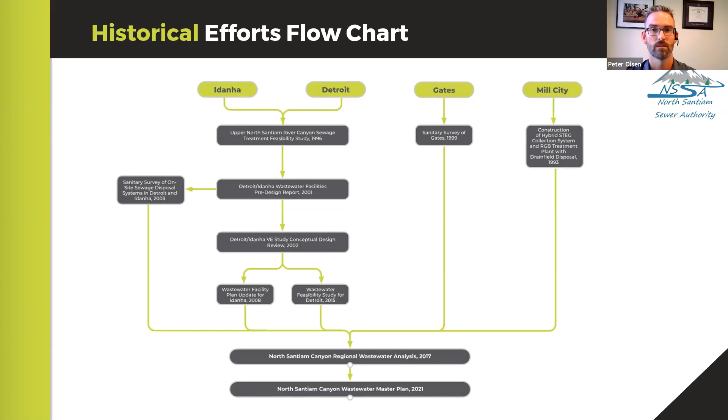Now we come to the master plan. We've come to a point where we have draft reports ready and have gone through the process of reviewing with the TRC and with the board, and we're here for this presentation tonight. The next 4 slides cover much of the information that was in the previous town hall. We have population for the planning criteria.

We looked at collecting a lot of data, working with the published data, the Portland State University populations. We looked at Sisters as a case study for what it would look like when these communities do get a community wastewater system, and what effect that might have on the population projections. We looked at environmental resources for the canyon communities. We looked at establishing the flows. We looked at Mill City since they're the community of the 4 that has an existing system.

Looked at the historic flows and projected those out. And then we looked at the winter water usage for Idanha, Detroit, and Gates to give us an idea of what the average dry weather flows would be for the new wastewater systems. And then used the peaking factors that were developed in the process and projected those flows out to know what to plan for. And then we provided additional capacity as well for future industrial commercial users that may connect to the systems.

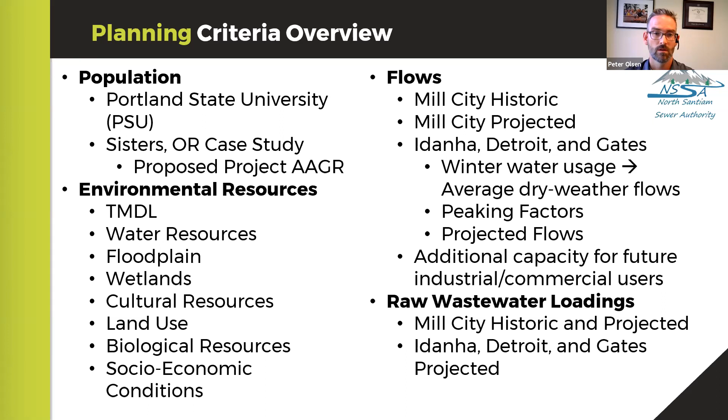We did a similar analysis with the raw wastewater loadings, looking at Mill City's historic and projected those, as well as recognizing that they are an effluent system only, and so the loading would be different than if it ended up being a gravity system. Our data collection process was pretty lengthy, collected a lot of data from each city. This is just representative of some of the cities and Mill City specifically with their existing system.

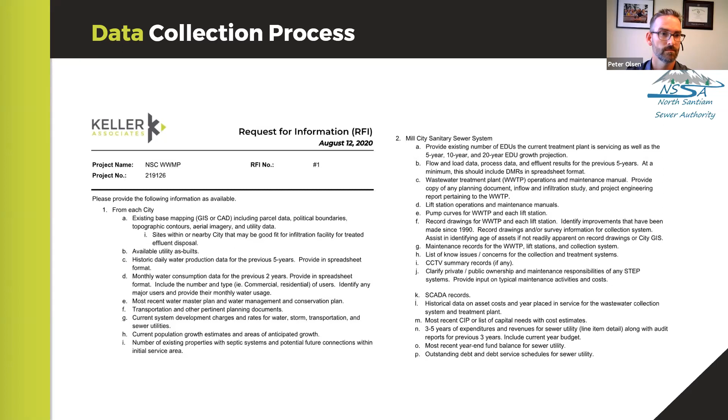As I mentioned, we looked at the population and Sisters, and then we used that to help inform the projections that we discussed with the TRC and the board and agreed upon what those projected numbers would look like. So on this one, Peter, if I could stop for a second, it has Gates, Mill City, Lyons, and Mehama on our original look that we did in 2017. After we were in the planning stages, Lyons actually did not want to move forward. And so while they're in the initial planning stage for the feasibility study, they were not included in the more final information. Thanks, Danielle.

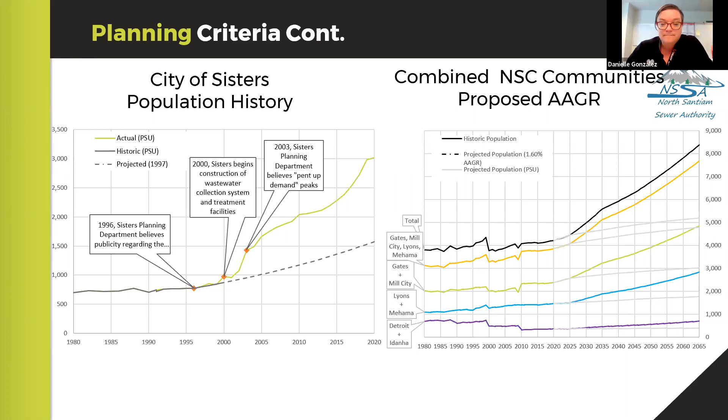This is just a representation of the amount of data that was collected, processed, evaluated, and looked at for Mill City as the existing system, but also the new systems for Gates, Detroit, and Idanha. What we're looking at is what I explained already with the flows, looking at the existing flows or demands for the water system and using those to help inform what the wastewater flows would be.

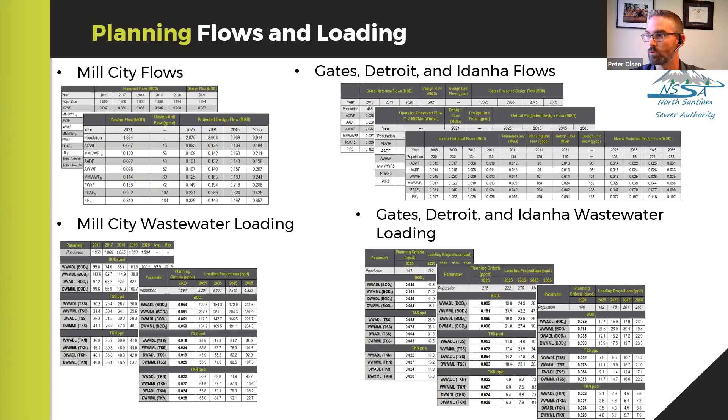Looking for questions as far as missed items there, anything that was missed from that planning criteria. And as I mentioned, this is a bit of a review from the previous town hall. And I'm looking to Danielle for those questions. Yeah, I'm not seeing anything in particular. We have one question that we'll hold off on just a little bit more until you get to the life cycle information, and I'm not seeing anything else in the chat right now. The only thing is about the city of Lyons, and so I'm going to answer that one in the response. Okay, thank you.

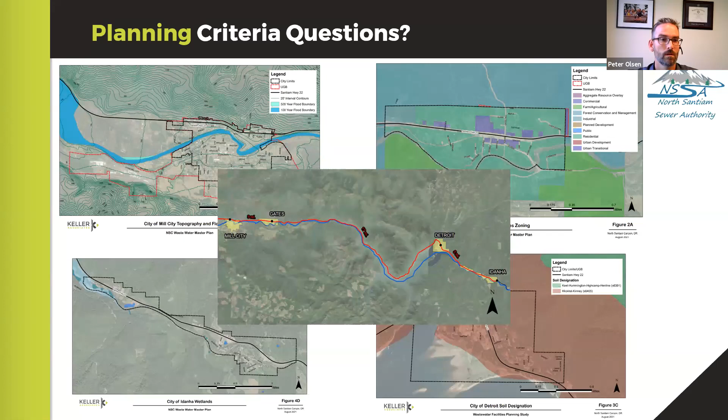And the treatment, it is a remote treatment, so it holds back the solids in the septic tanks. Some minor amounts that are in the effluent get through, but that treatment happens in the remote treatment with a recirculating sand filter. And then for disposal, it's disposed to a large drain field that is adjacent to the water pollution control facility.

Its performance that we reviewed and summarized was that it's observed that the historic flows have exceeded the rated capacity. When we started, it had come close. And then by the time we had finished and added additional data to supplement that, it showed that it had exceeded the rated capacity for the peak day flows.

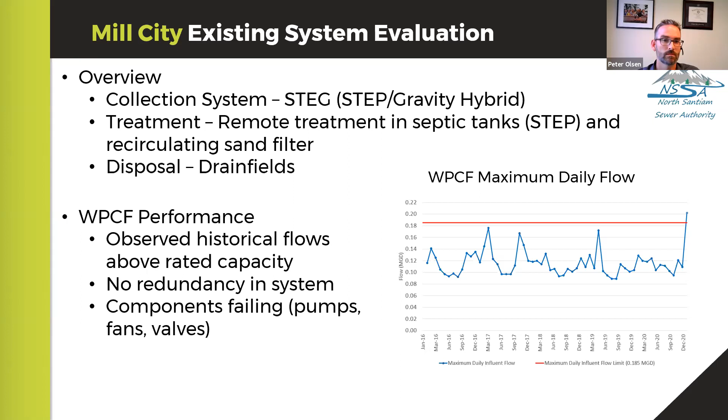Now we get into the collection system overview. We considered different alternatives, looking at the treatment and disposal basins with the 4 different communities, where they're located, adjacent, how far they're separated, and so on. Looked at transfer pump stations and force mains, and looked at potentially an overhaul of Mill City's existing collection system, the STEG, and then looked at STEP versus gravity in Gates, Detroit, and Idanha.

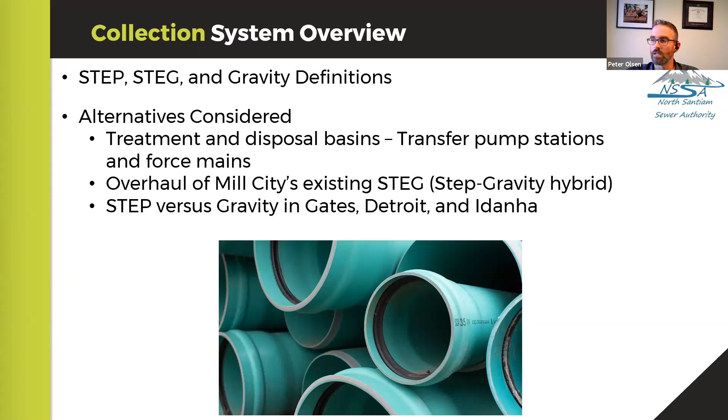A little review of what STEP and STEG and gravity is. The STEP is septic tank effluent pumping. The STEG, as I mentioned, is the septic tank effluent gravity. The difference being the STEP has a pump inside that pumps it uphill and into a pressurized system. And the STEG comes out of the septic tank and is gravity fed out of the tank into the collection system.

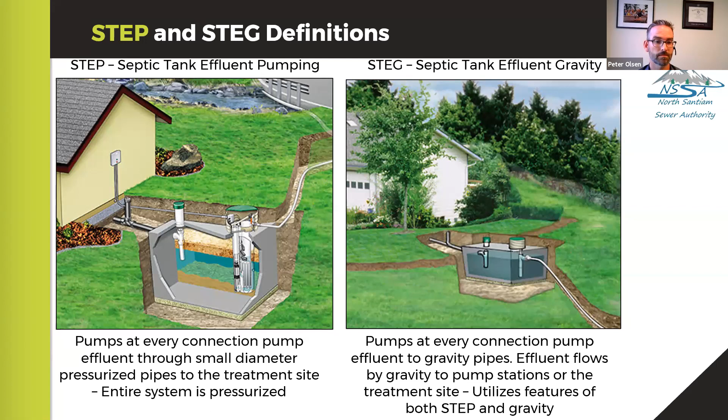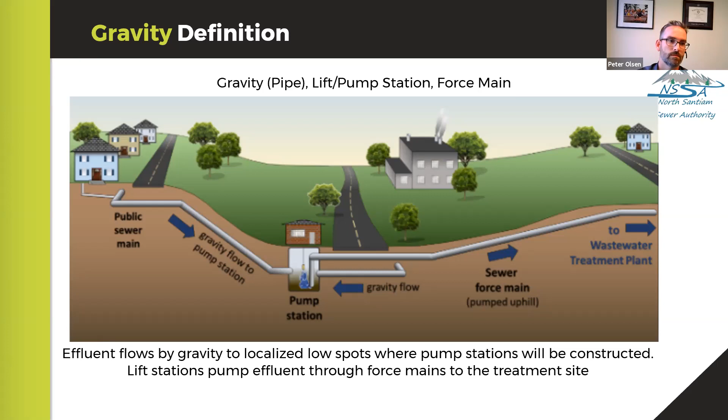As far as the basin recommendations, being Mill City and Gates and their proximity, and Detroit and Idanha and their proximity, the recommendation there is not to have pipelines between Detroit and Gates for a number of different reasons, the length being the major reason. So we're recommending Detroit and Idanha be combined as one sewer basin, and Mill City and Gates be combined as a sewer basin, and that has implications for the collection system as well as the treatment system and disposal as well.

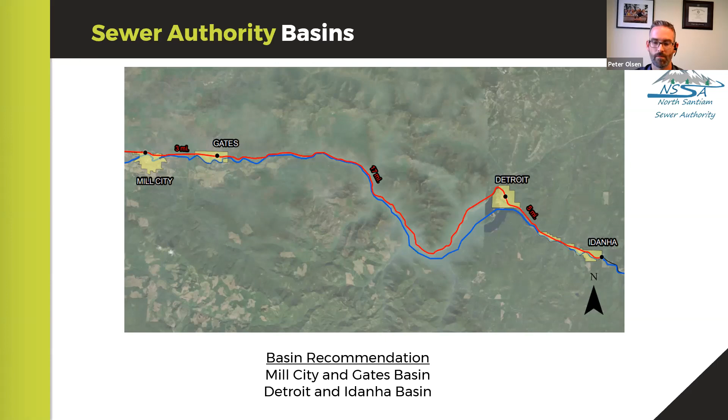For the regional pump stations, as I mentioned, and we'll have some more graphics to show this in better detail, they're looking at transferring the wastewater from Gates to Mill City to the water pollution control facility site, and then transferring the treated effluent from the Mill City water pollution control facility to the selected disposal site. And then for Detroit and Idanha, it's transferring the wastewater from Detroit to Idanha to a water pollution control facility site, and then transferring that treated effluent from Idanha to the disposal site.

And Idanha's collection system would be feeding to the same place that Detroit would be pumping to, and likewise Mill City would retain the same collection system, where it transfers all the wastewater to the water pollution control facility in Mill City.

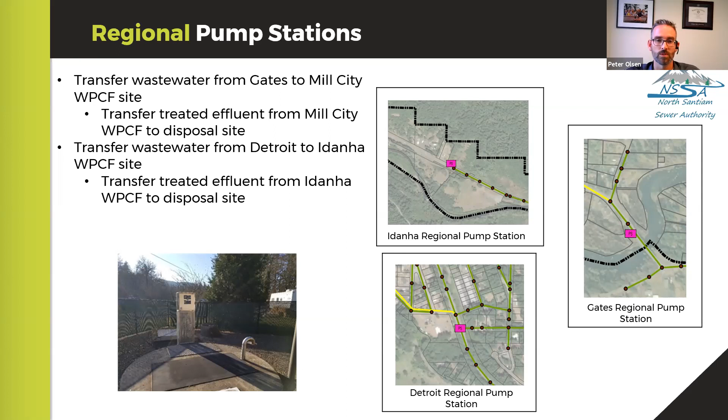For the collection system recommendations, we looked at evaluation criteria. We broke it out into 5 different criteria. We have the capital cost with the fixed initial expenses. We have the annual operations and maintenance, which is the annual expenses incurred by operating, maintaining, and servicing the system. The system reliability, which is the expected or potential downtimes of the system. And ease of operation, so it's the effort required by the system operator to ensure the system continues to operate. And then expandability, the 5th one, is the flexibility of the system to accommodate expansion.

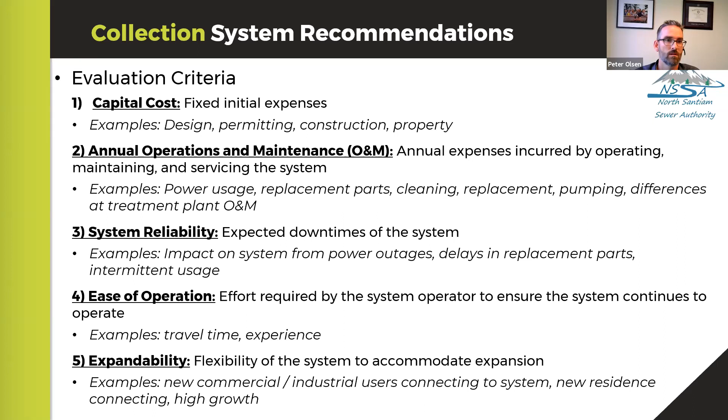Those 5 criteria you can see on the left side of the table here. We, in discussions with the board, put together weighting criteria that sum up to 1, and then looked at the 3 different options: all communities on a STEP system; option 2 with Mill City on the similar STEG system and the others on gravity, so that would be Gates, Detroit, and Idanha on a gravity collection system; and then option 3, Mill City and Gates on the STEP system, and Detroit and Idanha on a gravity collection system.

We assigned the scoring for the different evaluation criteria, which resulted in the scores here at the bottom, indicating option 2, with Mill City on the STEP, and the other 3 on a gravity collection system. And I'll throw that out there. There was a very long discussion on this particular piece about the weighting criteria and what was important in those communities. And there are a couple of questions in the Q&A section from John McCormick, and we'll get to those.

Peter, in your presentation, you've got the financial pieces broken out. Is that right?

The financial pieces of what these look like? Yes, I believe so, later. So okay, we'll make sure we get to those, John. I see your questions in there. One of the questions, of course, is the capital cost in one of the systems. Peter, if you could go back one.

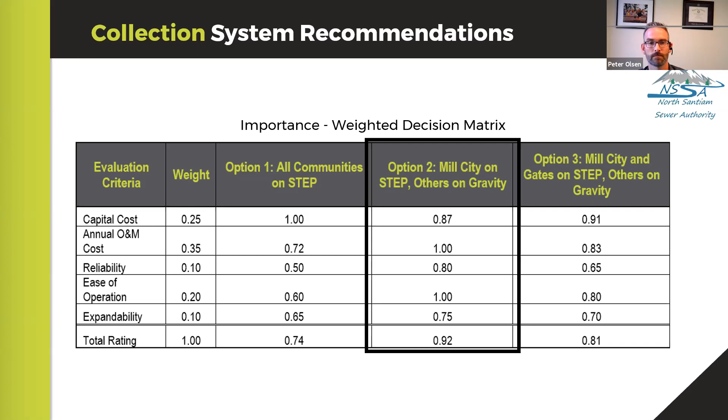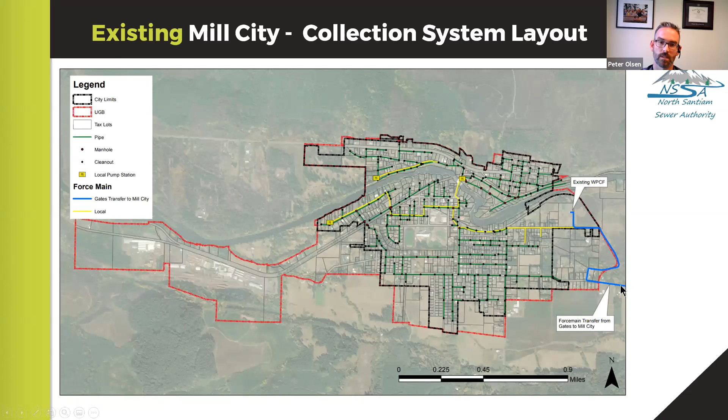This is the graphic representations of the collection system. So the existing Mill City collection system, this just shows what is already existing there, but adds the force main transfer from Gates to Mill City. We have Gates with the 3 lift stations and the regional lift station indicated, the 3 lift stations here in yellow, and the regional lift station located here with the force main transfer to Mill City.

The green lines are the gravity collection lines, and the yellow lines are the force mains from the pump stations to where they were anticipating they would discharge to the collection system or the regional lift station. And this would actually answer one of the questions that someone had posted via email a month or so ago.

This area on the Linn County side, on the other side of the river, is covered because it's within the city limits. So anything within the city limits in either Marion County or Linn County would be in this particular plan. And then there was a question about the force main going over the bridge over the Santiam River. And Peter's kind of assured me that is a common occurrence. You have to take some additional precautions and get approval through DEQ to do that.

But that is, yes, a possibility, and these locations, if you could use your cursor, Peter, on the Linn County side right over here would also be involved. Yep. Thank you. Yep.

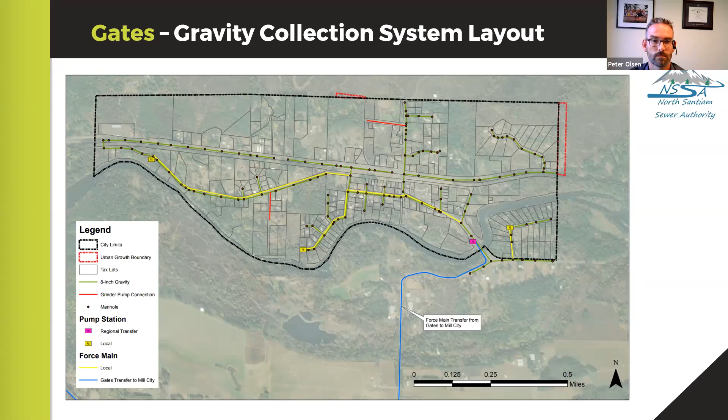This shows the potential path of the force main going from the regional pump station to Mill City. This yellow line is a potential path that we put cost estimates to as far as a potential disposal site. That site within Mill City has not been selected. That will be part of subsequent phases of the project.

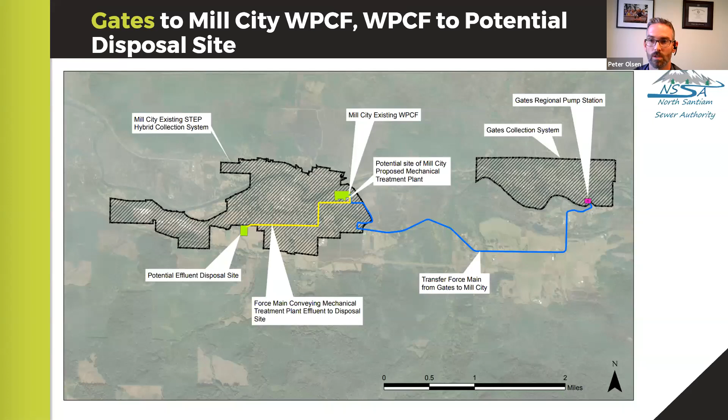But after a lot of review, and Peter, tell the truth on this one if there's anything I'm saying wrong, we weren't able to locate a suitable location in the Detroit area that was flat enough or had enough space, or doesn't impede on the 3 basin rule for us to actually do any discharge there.

Yeah, the disposal is the major challenge of this project. And there's even more criteria than that, and just lots of discussions with the regulatory agencies and everyone else in the technical review committee. Yes.

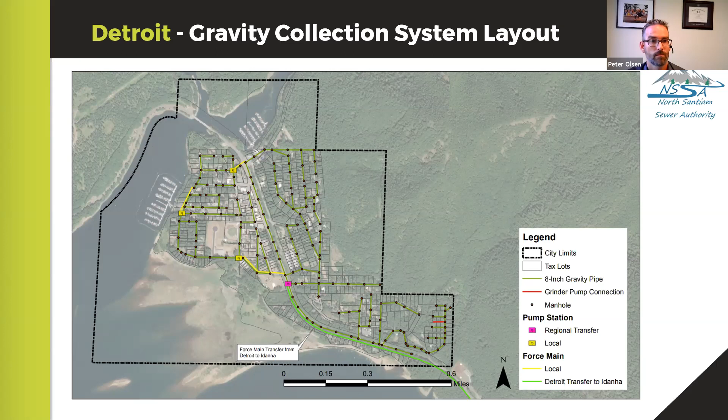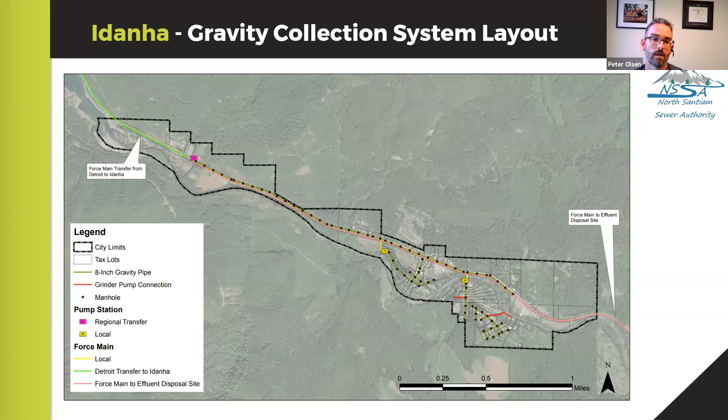And this is, as Danielle mentioned, a major hurdle and challenge for the wastewater in this area: disposal, and how to do it appropriately, how to be consistent or compatible with the 3 basin rule. Yeah, disposal of treated effluent. Yes. At a higher level of treatment than would typically otherwise be required.

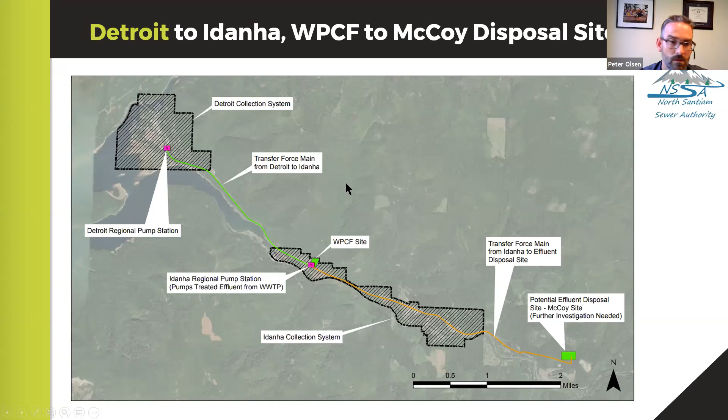Danielle, any specific questions on the layouts of the collection systems? So I'm gonna do my best. Let's see, John's got quite a few here. Hold on. Let me quickly.

The collection system of a STEP system versus a STEG system versus a gravity is approximately, according to John, an $8 million difference than the gravity system, and STEP is cheaper than gravity. And so I think I'm going to try to answer this one as best I can. Part of the reason the Sewer Authority has given Keller Associates the guidance on the upfront capital cost is it's more likely to be covered than the O&M costs in the future. And so they've made some policy decision on that. Of course, all of those things are being reviewed all the time because those policy pieces are going to change. Let's see, that one's a different one.

Okay, it says in the last sewer meeting, Peter from Keller suggested that there were many issues with the STEP systems, offering examples, saying it was a long list. On the collection side, out of the 4 that John McCormick has reviewed, he says that he finds the arguments to be weak or incorrect. The O&M cost for the STEP systems, I think you're talking about a specific product that's cheaper, not necessarily STEP systems in general. It looks like Peter considered the O&M cost for the STEP system pump replacements twice per decade for a 10-year cost of $1 million over time.

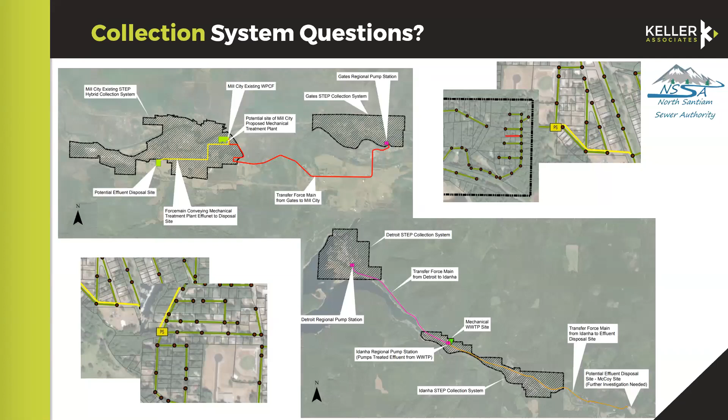Both the labor needed by the operator to service those pumps, as well as any replacement of bearings, seals, or any other components of the pump that can be replaced without replacing the entire pump. Okay. Thank you. That helps. Okay. I think we got that one.

And so another question about the state park and ranger station. This is in the collection system. So let's talk about that real quick.

So the state, there you're talking about adding the state park? Yeah, so we didn't include the state park or the ranger station in this initially. This is me just kind of talking through it. When you go through federal funding, it is forbidden to use federal funding to enhance other federal property. So the state park and the ranger station are technically outside of the city limits. And so we can get the lines as close as we can and stay within city limits, and then the state park or the ranger station can connect the rest of the way.

And that actually has been under discussion. And Peter, we put some flexibility on the expandability. Am I correct in that scenario? Yes, the anticipated flows and loading, yes. Okay. Yep. And I hope that answers that question. Okay. Okay, let's see.

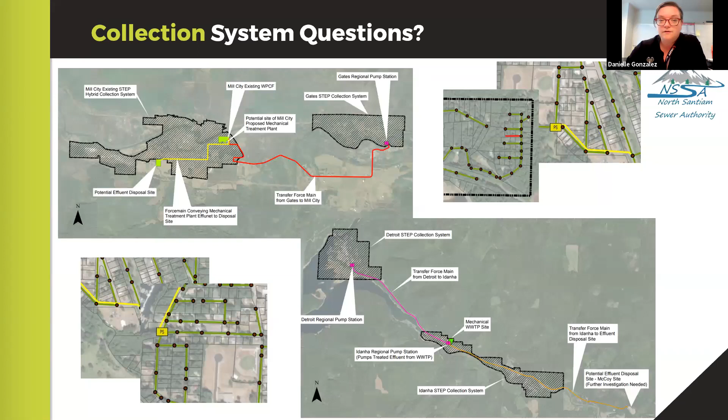And some of these other ones are very specific on costs, so we'll have to keep moving forward. Okay, go ahead, Peter. Right. Any other questions that anybody has? I'm not seeing anything else in the chat. So please feel free. All right. And then we'll try to keep answering questions along the way.

All right, as far as the treatment system overview, and Dallin, step in anytime you feel appropriate. As far as the treatment plant considerations, they're driven by the regulations, those permitting requirements, and the site suitability. This is a challenge in the Canyon communities, not necessarily because of the 3 basin rule, but because of the high groundwater quality requirements to discharge to groundwater. It requires a higher level of treatment. We'll talk about what that mechanical treatment plant overview looks like.

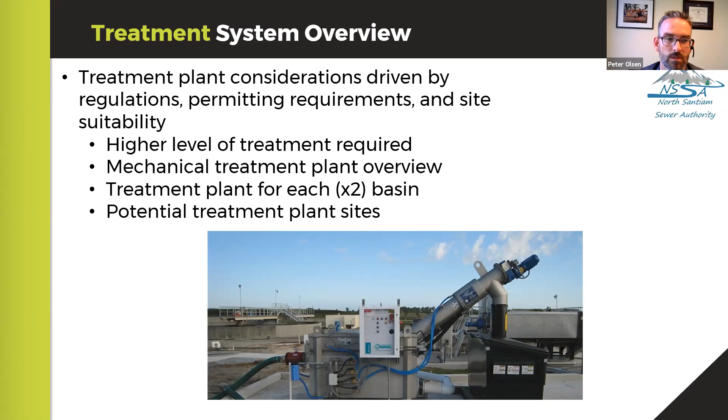And then the other thing to consider is we will need one treatment plant for each basin, so one for the Detroit Idanha Basin and one for the Gates Mill City Basin. And then talk about the potential treatment plant sites. So the mechanical treatment plant would include primary treatment, typically screening, grit removal, and these types of details will also be honed in with the facilities planning study in the subsequent phases and working with the DEQ for approval, as we look at the permitting process through the DEQ.

So it includes primary treatment, as you see there, the secondary treatment, biological treatment with filtration. And then prior to disposal, having UV disinfection and discharging to infiltration basins. And then the solids that are a result of the treatment process are anticipated to be hauled to landfill.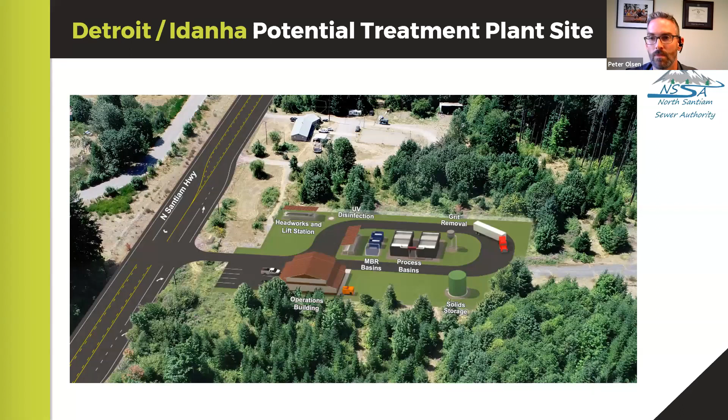So as far as treatment system questions, I'm not seeing any treatment specific questions. I'm seeing just STEP versus STEG questions, and I'm seeing John, and then let's see, oh, moments, okay.

Okay, this question says, I was contacted by Peter regarding testing to aid with the 3 basin rule. I've not heard back regarding the need for the location for the testing. Is this down the road later, or can I put this subject to bed? So this would be up in Idanha. And this is testing for a specific site? Yes, it was the testing, I believe, for the infiltration adjacent to the highway there.

Yeah, I'll throw this in. The master plan gives permission for the engineer to move forward on the next piece, and the next piece becomes the testing for water. DEQ requires a year of testing.

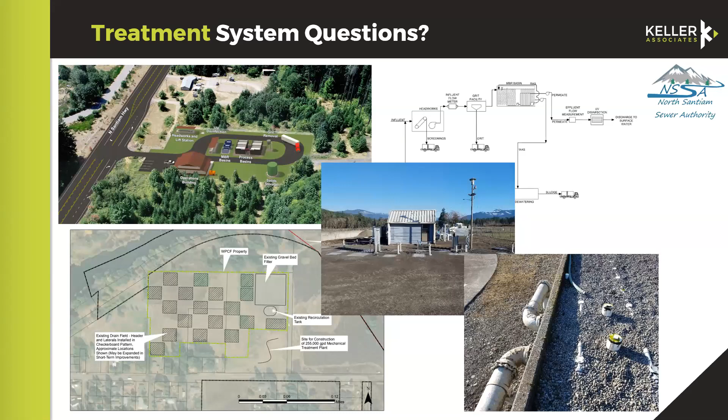Okay, thank you. Okay, I'm not seeing any other questions at this moment on this piece of it.

Now we'll talk about the effluent disposal, give a system overview here. Again, the disposal system is very heavily driven by the regulations, the permitting requirements, and site suitability. That's a large challenge for the North Santiam Canyon area. We're looking at the 3 basin rule, we'll talk about that, and give an overview of the rapid infiltration basins, and potential disposal sites for the 2 different basins. We'll discuss those in the next few slides.

There's a couple questions. Sorry, if I could go back for a minute. How much carbon does Mill City have to add to the system? Is it true that solids are normally separated out of a gravity system before carbon is added? So can you repeat the question, I'll do my best, I want to make sure I get that. Yeah, how much carbon does Mill City have to add to their system? Is it true the solids are normally separated out in the gravity system before the carbon is added?

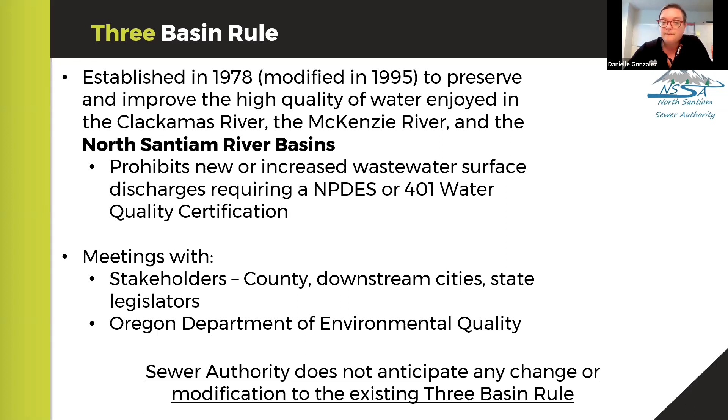In the past, that was actually one of the things that made it difficult to find a suitable location for the Detroit-Idanha area. So this is the work that we've been doing, desperately trying to find a suitable location. Work in progress.

In that search for a 3-basin rule compliant disposal method, we looked at drainage fields, surface infiltration, land application, surface discharge to the North Santiam with modification - but that was shut down quickly and we were told not to go that route - and injection wells and aquifer recharge. Eventually we settled on the rapid infiltration basin.

When we looked at land application and other options, that was not just one single site we were looking at. We looked at a number of various sites throughout the canyon, within city limits, outside city limits, in neighboring Forest Service property, and so on. We also looked at the expected or required effluent quality for the different disposal methods, which plays into what could or could not be done.

Just to reiterate, when we're talking about disposal, we're talking about disposal of treated and potentially even reusable water. That's really what it comes down to. Please tell me if I'm wrong on that, Peter. Say that again, I lost the train of thought, I apologize.

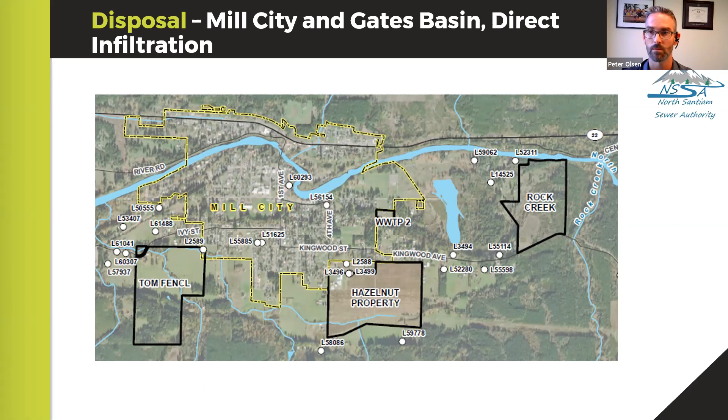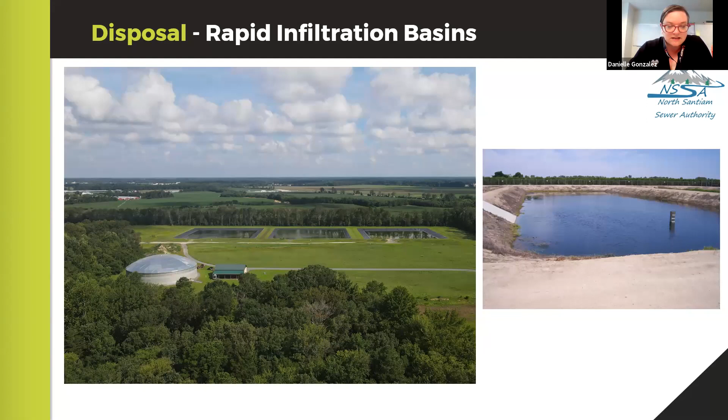Peter, if we could go back to the previous slide, there's a question. It says: the treatment plant shows headworks, grit removal, solids holding tanks. Are these included in your step evaluation system? It says step will eliminate most of the solids at the source. Also, does the plant require nitrate removal, and if so, is the denitrification before or after BOD removal?

I'm going to look to Dallin if you want to help me out with some of those answers. I'll do my best. There were a couple questions, so if I missed one, I apologize. While it is true that a step system does remove some solids, it does not remove all of the solids that may be necessary with a membrane-type filtration system, which may be required to meet the effluent requirements. There are other technologies that could be evaluated, but it is likely that a headworks screening and grit removal system will be required regardless of what type of collection system is provided upstream.

I think that's the first question. The second half of that question — Danielle, can you read that again for me, please? Sure, it says: does the plant require nitrate removal, and if so, is the denitrification before or after BOD removal? We are anticipating, based on what the groundwater quality needs to be at the disposal site, that denitrification will be required. Denitrification and BOD removal occur simultaneously in the process basins.

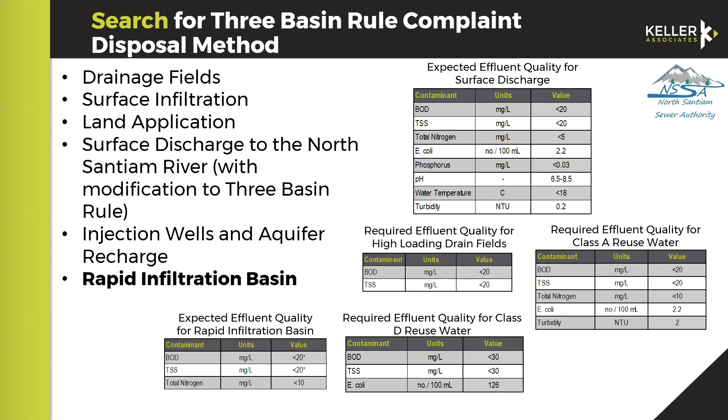Thank you. Sorry, give me just one moment. Let me double check and make sure there's nothing else I'm missing here. Okay.

One other question, from John McCormick: Keller's numbers for step versus gravity assumes less than double the additional carbon for step. That cost difference is minimal compared to the total O&M. Has the infiltration and inflow, which dilutes the wastewater in a gravity system, also been factored in? It has been factored in with the flows that we're anticipating. Okay, thank you.

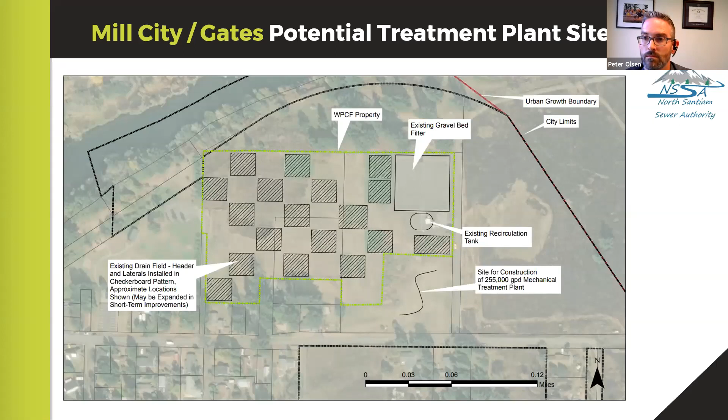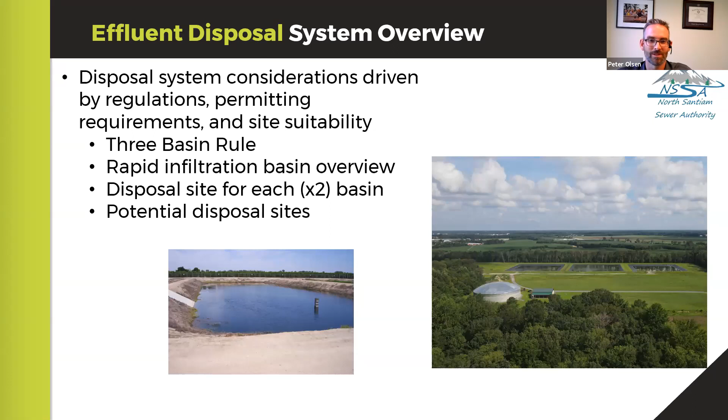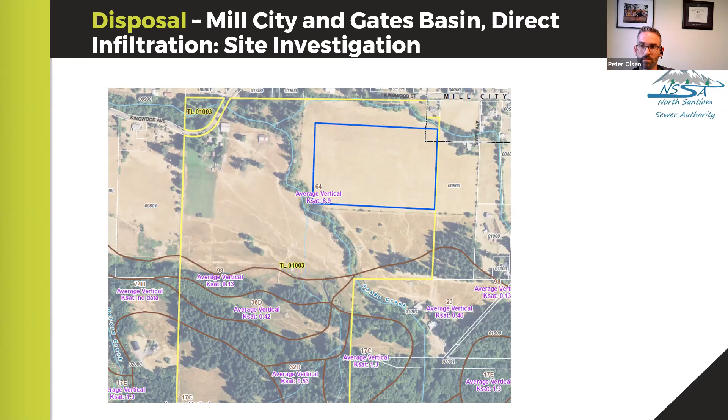So this, like I said, is a potential site. It's not the selected site for the Mill City area. That process still needs to be worked through.

In the McCoy site concept, in the Detroit Idanha Basin, it was quite a bit of a challenge, but we were able to locate an area with interesting geology that would potentially allow for disposal, as it creates a longer flow path before reaching the river, and can be justified as not directly connected. So we're working through that process and recommending additional testing on that site specifically, doing the infiltration testing as well as groundwater monitoring, and that's a process that takes a year.

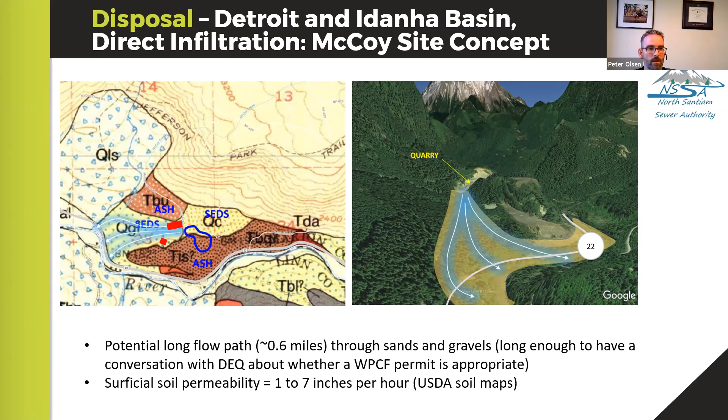And this is Forest Service property. The question earlier was from a private property owner, I believe, Danielle, where we're going to have to install monitoring wells on that property. So we'd had a conversation, and I believe that question derives from that. All right, and then this is a plan view of the same location.

Provided by our sub-consultants, GSI. And it's showing potential locations for monitoring wells that would be used for monitoring the groundwater, and other test pits for testing for infiltration and soils, and to be able to do the analysis that they need to do.

And these were sites that were not reviewed in previous iterations of the engineering reports that were done for the Detroit and Idanha area in the last, I want to say maybe 10 and 20 years. These sites weren't identified previously, so this is kind of a newer concept that we're trying to work through all of the pieces on, and hoping that we can get it to a 3-basin rule compliant site.

And because of the distance to the river, I think that gives us a little bit more likelihood that it could pass through DEQ. Initial conversations have happened with DEQ on these particular sites. Yeah. All right.

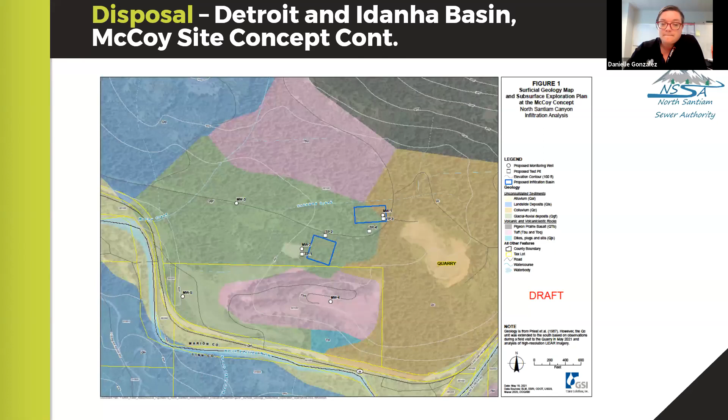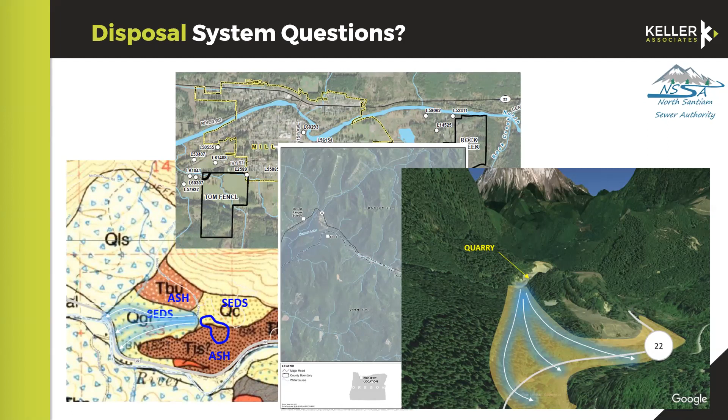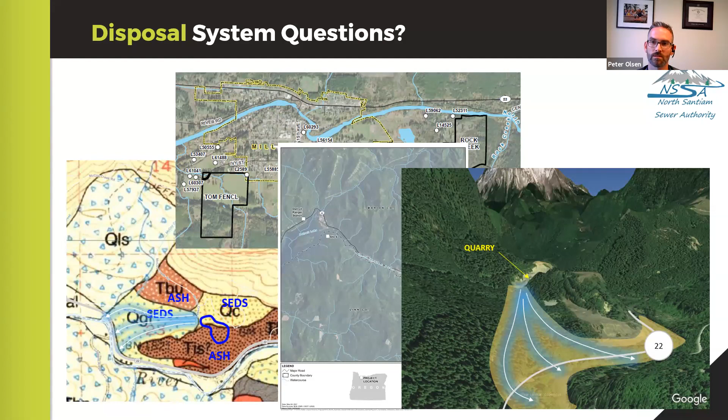Okay. Okay. There is another question. We'll get to this other question that just popped in in a moment. Okay. Are we moving to the next slides, I think so. Danielle? Yeah, looks like it. Yes, thank you. All right.

For the room, Marion County put in a request through the Oregon legislature after the wildfires for funds for the sewer project. $50 million was authorized under HB 5006. At this point, we don't know how that's going to roll to us and how that's going to work. When I say us, I mean Marion County. Marion County is going to have to be the fiduciary in that because that's a significant amount of money that the sewer authority does not have at this point.

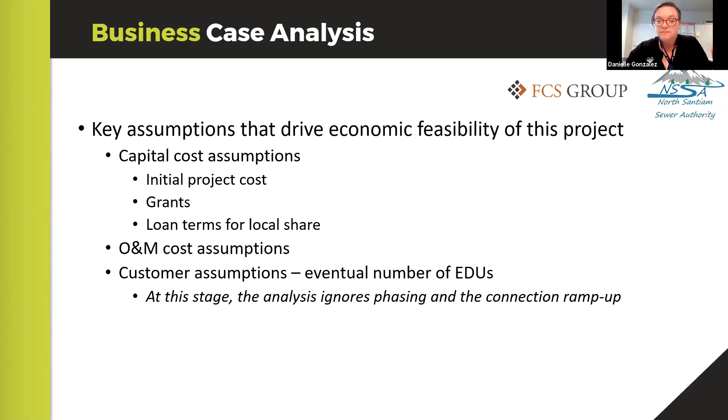And at this stage, we're ignoring the phasing and that connection ramp up, and the other pieces that are not included in the financial projections, like things that couldn't be estimated. So for the financial, sorry, go ahead, Danielle. Dallin said Mill City has approximately 700 connections, just to answer that question. Okay.

As far as the financial goals, it was discussed that a minimize O&M strategy is a financial goal for the sewer authority. So looking at minimizing ongoing costs, and allowing for that higher upfront cost. The assumption of the whole strategy is we're assuming the treatment or the disposal at the McCoy site, and the gravity collection system is more costly to build, but less expensive to maintain than a STEP system.

Pay off Mill City debt instead of assuming an annual debt service. So there's existing or outstanding debt that Mill City is making payments on. Instead of assuming those payments by the sewer authority in a transfer of their system, paying off that debt instead of continuing to make those payments would lower the ongoing costs. It'd be purchasing the assets when there's still debt on the asset.

And then the user rate target, Danielle, I'll let you answer a little bit more about the 1.4% of median household income. Yeah, that is the requirement at the federal level for funds, USDA, which is generally a large funder. At the state level, it's about 1.2% of median household income, but we're assuming the 1.4.

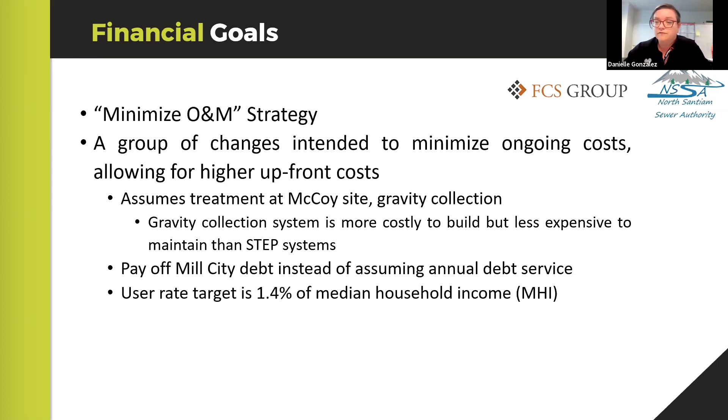So the key, when we talked about the balance of financial feasibility, you don't want to add a whole other area that's serviced by these treatment and collection facilities if they don't add to the number of users, right? There were some questions of whether we could cover some areas outside of the jurisdictions. Until there's actually enough users on that expansion to offset the user rates, it would be less likely, because we're trying to keep those user rates as low as possible.

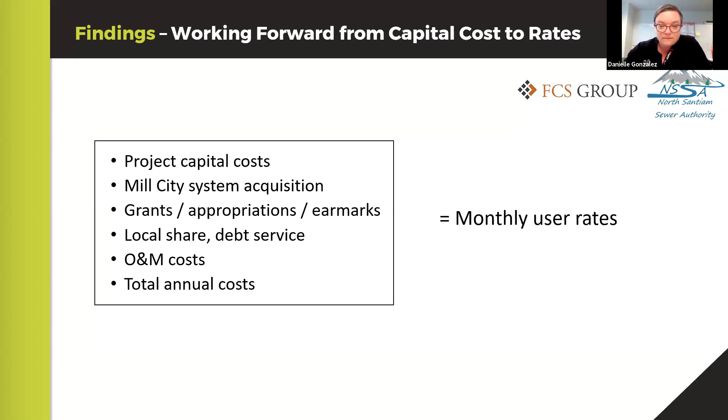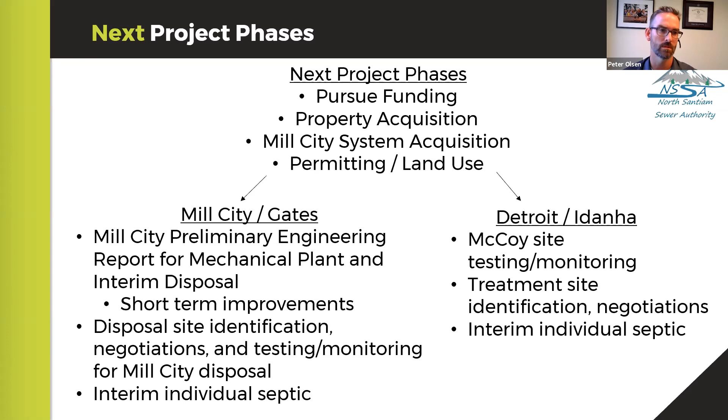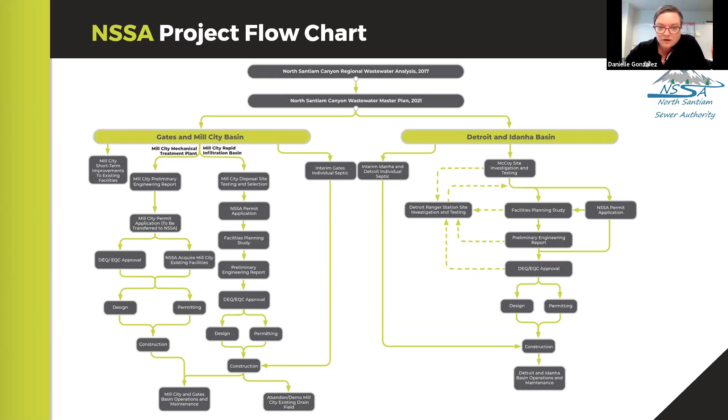There were a couple of questions, and I want to pause and make sure we're answering any questions that are coming in. We're there. Yay. Last slide. Okay. Okay, there's a couple of questions here. Give me just 1 second to read through them so I can understand them.

Okay, does the step system, including lift stations, did you do a hydraulic evaluation to see if they can be eliminated? And then there's an O&M cost for modern step systems that's typically less than $100 a year. I don't know. So I'm just going to speak to just one piece of that. I'm going to ask a question actually in front of you guys.

So Peter and Dallin, I know that people that have these advanced technology septic systems in their properties now have maintenance contract requirements that they have every single year. The person I talked to today just signed one for a brand new house, and it was $800 a year for that maintenance contract. Are those things that are also needing to be included in those, or are those completely separate for individually managed systems?

Dallin, do you want to take this one? Sure, I can go at it. So Danielle, to make sure I'm understanding your question, you're asking about advanced septic systems. Mm-hmm. Yeah, which we have a lot in. We have some in Gates. We have some in Detroit and Idanha. The evaluation that we put together did not include any O&M costs for the advanced septic systems.